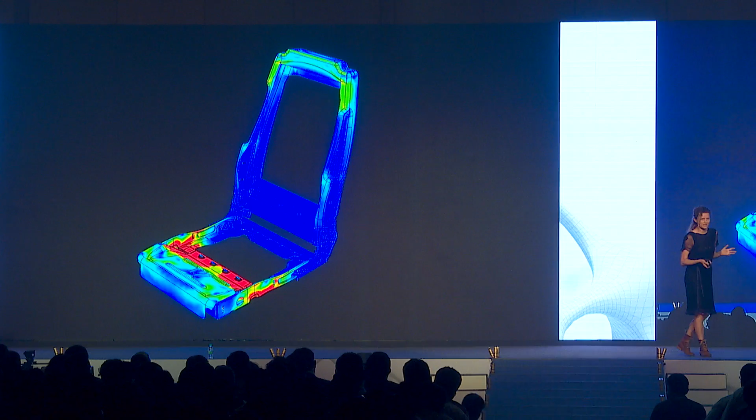The simulation comes back. I see in the red zone that it might crack, so I'm starting to change the design, add a little bit of material to pass the simulation. Did I make a better design with that? Maybe. But did I make an optimal design? No.

Now, with infinite computing, what we will do, instead of evaluating one option at a time, we can evaluate many options at the same time. That is the value of the infinite computing. It can extrapolate, it can mutate, it can mash up thousands, infinite numbers of designs simultaneously.

Welcome to generative design. Generative design takes goals that are set by a designer, by an engineer, such as cost, weight, style, material, etc. Basically, think of any criteria that describes the problem, and uses intelligent algorithms, very often based on evolutionary patterns, to basically create a massive number of design options, design variations. We say it opens the design space to evaluate all the options.

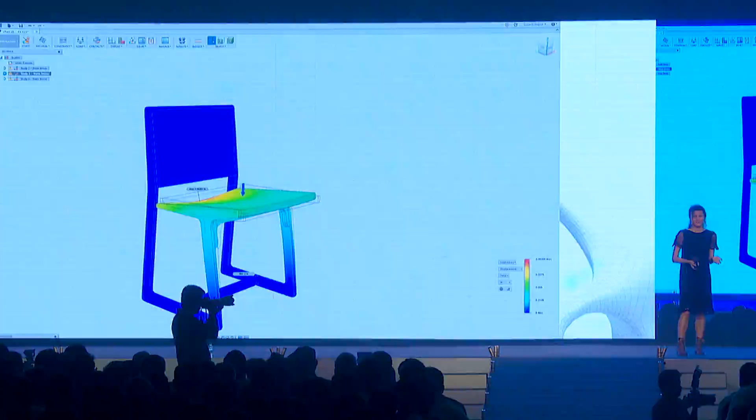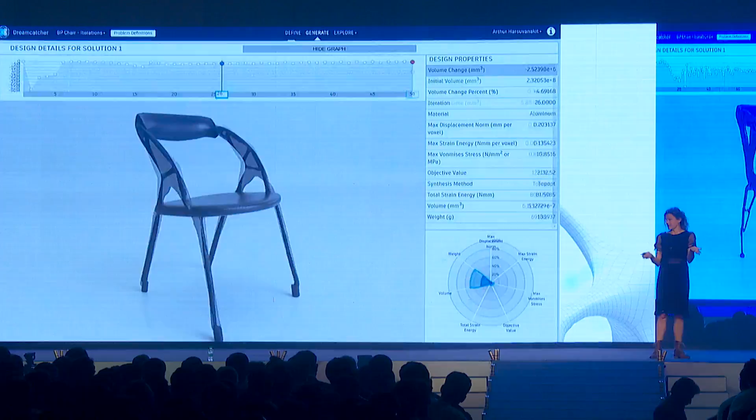So with generative design, instead of applying simulation after we finish design, or do simulation during design, we're going to simulate to design, to discover all the possible options within the entire space. And this evidently will lead to major reductions in cost, in development time, material consumption, and in product weight. But it's not only that. This new approach lets us design in a new way and lets us see options and variations and designs that we could never have thought of before.

Now, since you all love motorcycles in India, it seems, I wanted to show you a competitor to your motorcycle. These are the Lightning motorcycles. It's an Autodesk startup, and they have produced the fastest motorcycle in the world. I ride a Ducati. It's not as fast as this one. So, did I mention it's an electric bike? So winners stay winners only if they improve. So they keep on thinking, what can they improve to make this bike stay the fastest bike in the world?

One goal is to reduce the cost and weight, to improve the lightness of the bike. So here we see a swing arm. That's usually a very strong part. It's quite heavy because it has lots of forces. So they started to look at how they could reduce the weight of this part. It's a complicated problem because it has a lot of

various forces that come to it, and it has to hold the whole bike. So we applied generative design to the problem, and we arrived at something like this. As you can see, generative design mimics nature. What you see in the first image is actually a cat pelvis. The second is a dog pelvis. The third is the design we arrived at.

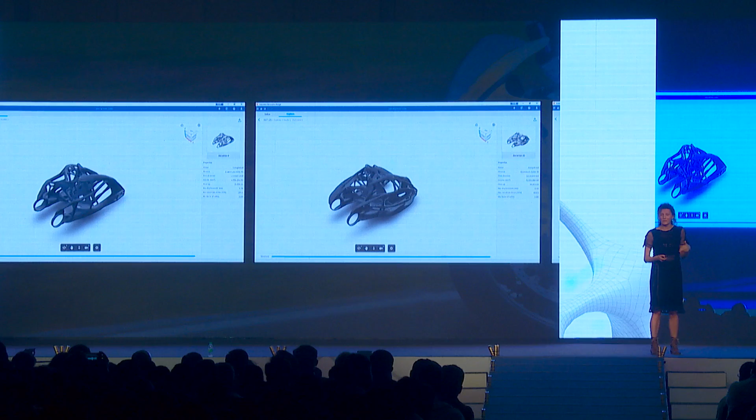But that was when we gave generative design the shape to start with, and then we optimized the topology of the shape. But we don't have to start like that. Instead of using generative design just to converge from our design, it can diverge from our goals. In this case, we will just tell it the goals, set the constraints - where are the forces, where is the weight - and we'll get the system to generate many, many options. Then we, as designers, decide which of those options makes sense, understanding the trade-offs that we cannot calculate at the same time because there are many of them.

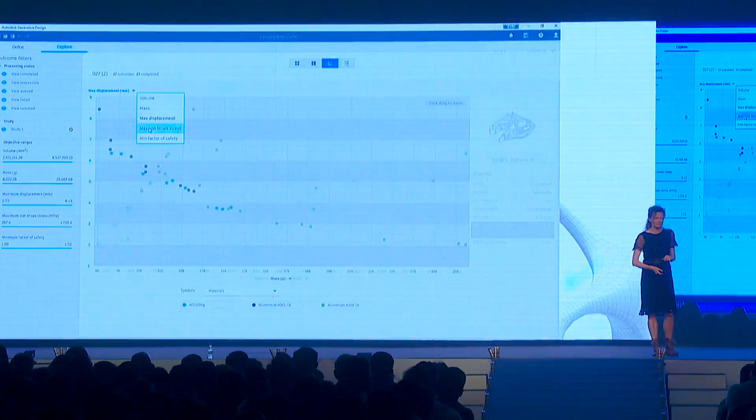And then we can apply simulation to validate the design to finally arrive at something like this. This is a very curious design, and it's not a design that somebody would have come up with. So there are very interesting things coming.

From last year, you might remember we worked a lot with Airbus, and they're really interested in improving the experience of flying, making flying more affordable for us, but also making it better for the world, more sustainable. So the first project we did with them was to address one of the partition walls that is very heavy, and to use generative design to basically reduce the weight of this partition wall, but without impacting its bare function, which is to hold the stewardess seat.

So we ran it again through the algorithms, and as you can see, it was crunching and crunching through many variations, giving us feedback all the time - if you do this, you gain this, but you lose this. Finally, we arrived at a number of selected options, and from something that was completely solid, it ended up using a third of the material. It was 45% lighter, and it saved Airbus a lot of money. Now listen to this - Airbus thinks that if they implement this partition wall on their entire fleet of A320s, that would basically be like removing 60,000 cars from the road.

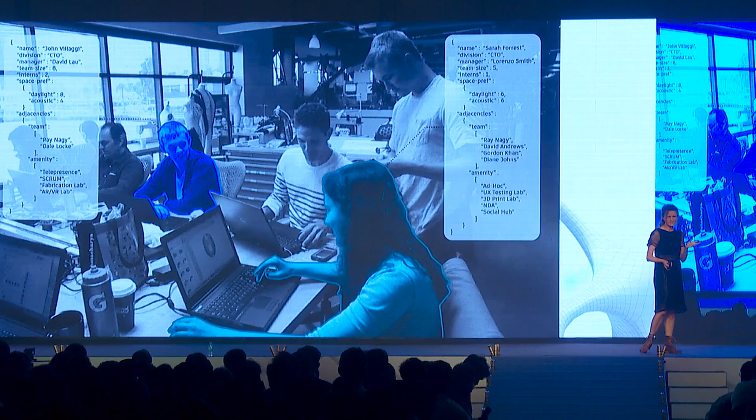We interviewed all our colleagues and asked them: where do you want to sit? Do you want to sit next to the window? Do you want to sit next to the kitchen? Do you like to be quiet and not have people bother you, or do you like to be in a community, etc.? So basically any factor that was making their life, and thus work, better.

And then we defined the goals. What's very important is that you define measurable goals. The system evaluated the survey data against a set of hard constraints - we had hard constraints because the building was already built, so we had to agree where the corridor is, where the kitchen is, etc. And then we let the system go.

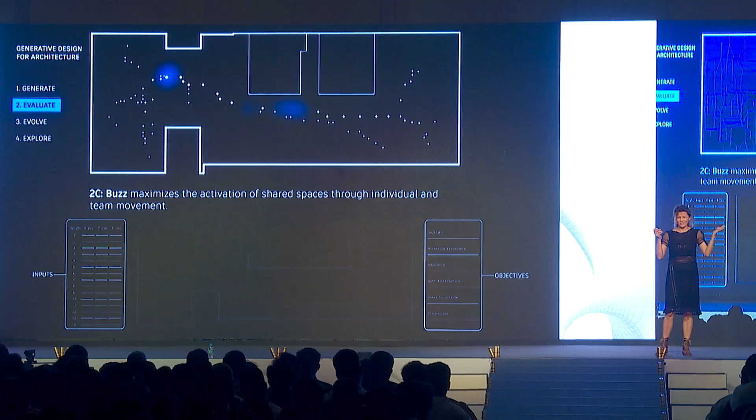The power of automation. Think about all of this. We as humans could never think at the same time of so many factors, so many people, constraints, and trade-offs. But the computer can, and it can visualize it, and give me information I could never have had before to make the right decision.

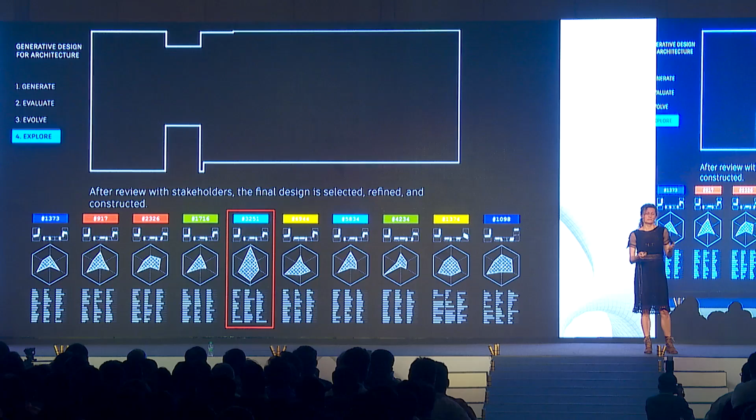This system generated, evaluated, and evolved over 10,000 options, and it arrived at something our colleagues are quite happy with. We'll tell you next year how it went, but the first two months seem to be working out. What's important is we were not just pushing cubicles or Lego boxes to understand how to do this.

Our relationship with the tools changed. Earlier we were just directing them. What we do now is create a relationship in which the tool understands us, understands our goals, and serves as a collaborator to offer options to us. So remember, generative design is not just about surface or volume optimization or topology optimization. It can help augment our own creativity.

Now, many structures and products that we can generate with generative design result in geometry so complex that no subtractive, traditional type of manufacturing can produce. It is thanks to additive manufacturing that we can actually produce these things.

So let's talk about additive, or as we popularly call it, 3D printing. Unlike subtractive methods of manufacturing, where you take a piece of material and carve out until you arrive at the shape you want, discarding a lot of material, in additive we just lay layer of material and use only as much material as we need. That is the first value of additive. But that's just the first one.

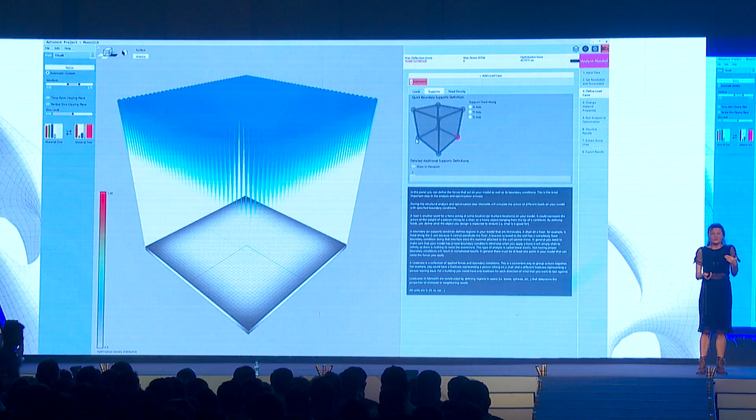We're also experimenting with voxel-based technologies. Why? Because if a printer can literally print every pixel, every voxel in different material, density, and color, then we need to learn how to design for that. So this is not only topology optimization as shape optimization, but material distribution across the product, so that we can design products like this, or create materials with non-linear behavior, so that our designers, you, can create beautiful designs like this one from Sawako Kaijima with beautiful, beautiful details of this table.

3D printing today prints small, slow, and expensive. But we want it cheap, fast, and big so we can go in AEC, right? So we do something about that as well.

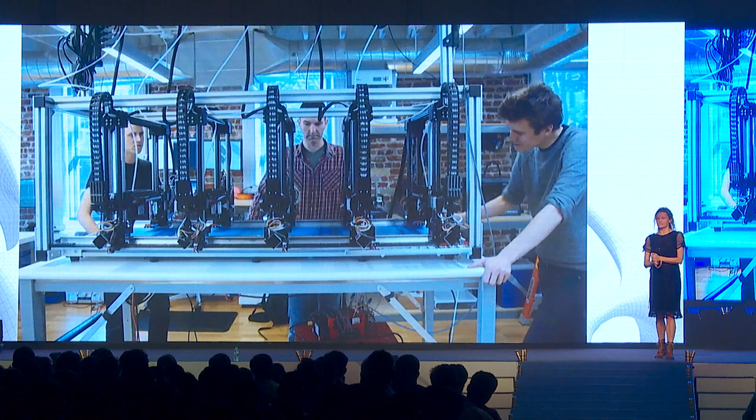We have a project called Escher. It's an OEM software that anyone can use to build machines. What it does is make the fabrication process parallelized across multiple tools. In this case, you're seeing 5 print heads, and our Conductor software instruments them so they're all dancing together to print one large part.

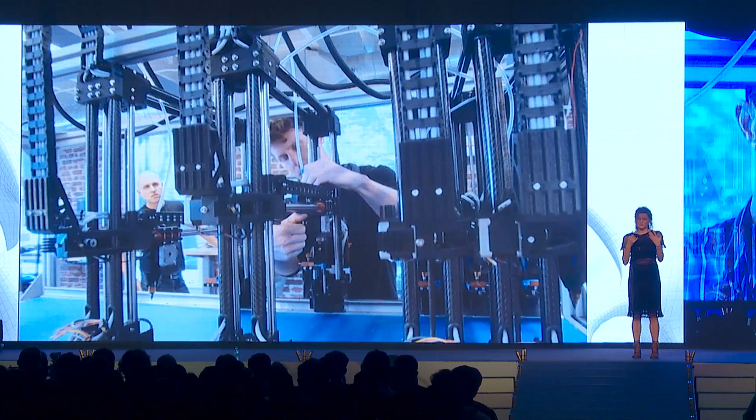What's really important to remember is that this system is flexible enough to accept not only additive tool heads, but also subtractive, because the future of manufacturing is not additive, it's not subtractive, it is both. It's both of the two worlds that we will need to arrive at a better future.

In the future, we'll be able to apply the same principles on every level, from nanoscale to urban level. We'll be able to print DNA, print organs, print fractured bones, print custom prosthetics, print food, print new performative materials, create new types of fashion, create cars.

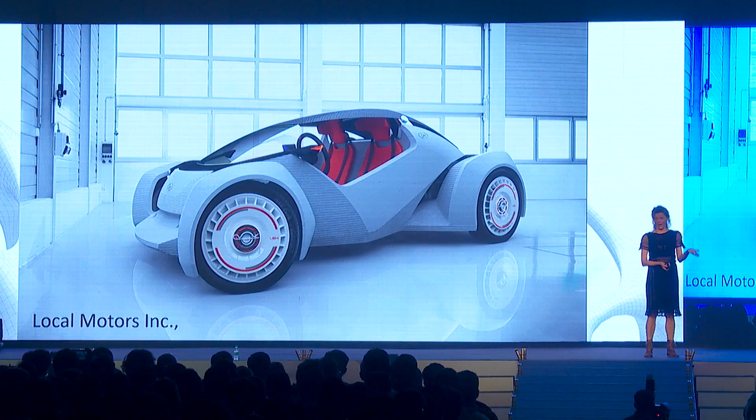This is already the first car that is 3D printed. It's Strati from Local Motors.

We can print buildings on planet Mars or on planet Earth, like this building from the WinSun Group that is actually costing just $5,000, and can print 10 a day. It's low-cost housing. But this is just becoming stronger, bigger, and better.

And there is a lot to see in the upcoming years.

Now, Pat mentioned the magic word sensors. We also live in an age of sensors. The sensors are becoming so ubiquitous, they're becoming smaller, more powerful, more affordable.

So today, with the laser scanner, for example, it's easier than ever to digitize the analog world around us. Once we digitize it, we can convert it to point clouds of buildings, of spaces, that can then help us actually start working in the space without having to always first redraw in AutoCAD or remake in BIM in order to even start the task.

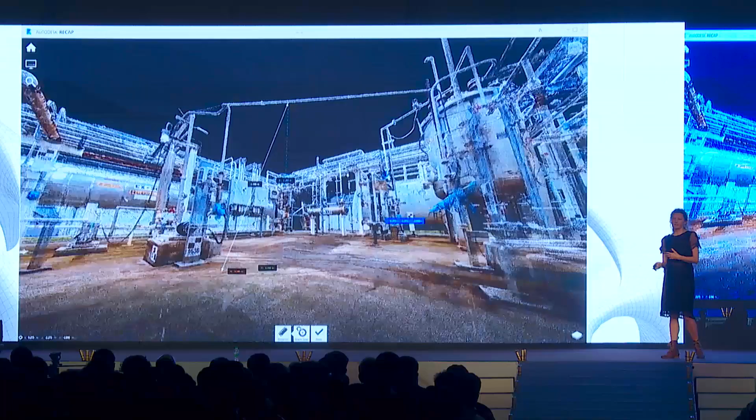This is how a scan looks like, without any post-processing. With smart software, we can register individual scans with a single click, visualize the point cloud in many different forms, measure it, and most importantly, prepare it for our hero apps so you can use it as a start for capturing context of a project, for capturing progress on a construction site, or seeing the difference between as-built and as-designed.

There is another process, even easier. It's called photogrammetry. Today we have the possibility, with simple photos taken with your iPhone, to take a bunch of photos around an object or from a space and automatically convert them to a 3D model. It's fascinating. Could you have done this with Max or Maya? Of course you could, but you need expertise, you need a lot of time to do this. This is just taking photos, and the algorithms do the rest.

So now put these cameras on a drone, and we have a whole new world of access from the air, where we can easier than ever capture entire sites, either for pre-planning in construction or for land takeoff, etc. The drones today are becoming so easy that you can walk and they follow you like a dog. They can be flown easily by defining a flying path, etc.

A lot coming here. But this is not only interesting for new buildings. We're talking about, for the first time, the possibility to save our heritage. We're losing our heritage on a daily basis due to tsunamis, earthquakes, wars, terrorist attacks. We have an obligation to our future generations to save it and capture it, to make a blueprint of what we have today, and maybe use it for further restoration, etc.

In India, the government of Rajasthan is the absolute leader in this area. They have realized the potential of this technology, and they're not only using it to capture the gorgeous palaces they have in Jaipur and all around Rajasthan, but also planning to use it for further planning of the cities, marching towards the smart city concept.

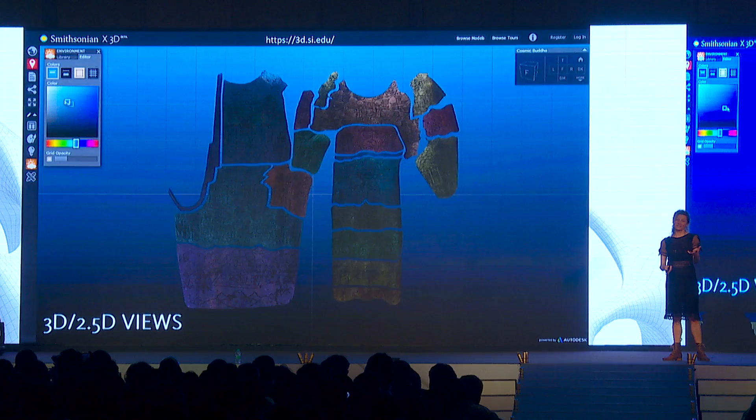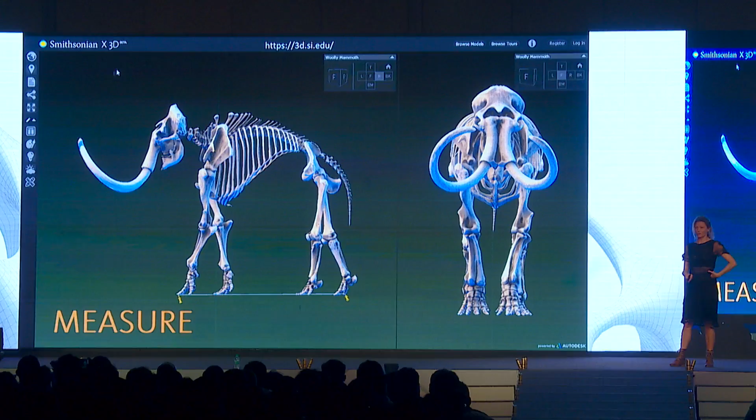Well, how about putting the museums online, where curators can tell the story about their objects in a 21st century way, but also teachers can teach with this tool that is now an online tool that displays all of these digitized objects and teach in a more experiential way, in a way that the kids of today would love to learn. So imagine you're a teacher who teaches about the mammoths, and you tell the kids, hey, open the Smithsonian model and tell me how tall is the leg of the mammoth, or let's make some art with this mammoth. Let's make a sticker for the t-shirt. New ways to educate. The latest project of the Smithsonian digitization was the Apollo 11.

You can see it actually in the exhibition hall. So we digitized the heck out of this object because usually nobody goes inside, and it was going to be open from the plexiglass box for another exhibit. So we did photogrammetry, laser scanning, structured light scanning, everything possible to capture a record of the Apollo 11. Today, you can take the AR/VR set in the gallery and actually sit in the Apollo 11 as the astronauts did.

Professor Saunders from Penn Design is using the same technology to teach. He's teaching Baroque architecture, and very similar to your traditional vernacular architecture, Baroque is very complex. But when I studied architecture, we learned from floor plans and sections. Well, you cannot really learn like this, because Baroque, in this case, is architecture that is a combination of painting, of sculpture, and of the architectural elements. So what he did, he went to Italy and captured with his students 14 of the most iconic Baroque objects, Baroque churches, and he created beautiful topology of these churches.

Then they created a website on which you can experience these churches with beautiful imagery. These are, by the way, the interiors of the churches. Imagine you fill a church with water and then you freeze it. This is what you're seeing. And you can also see this exhibit in our exhibit hall. The idea is that students now for the first time can understand the whole complexity of Baroque architecture, take a church and start reverse engineering the language behind Baroque architecture. So you see, same technology, a lot of different uses.

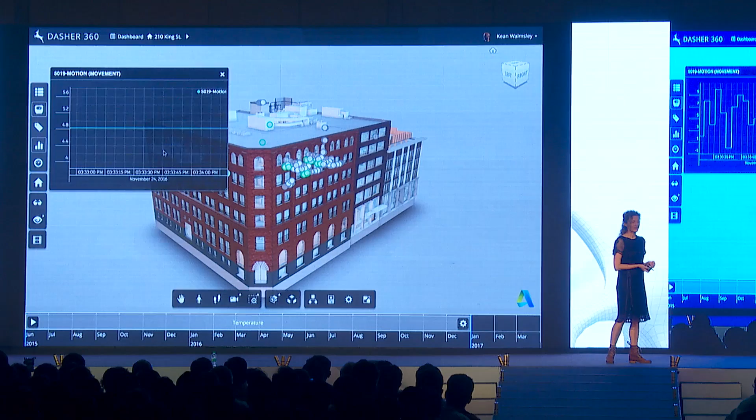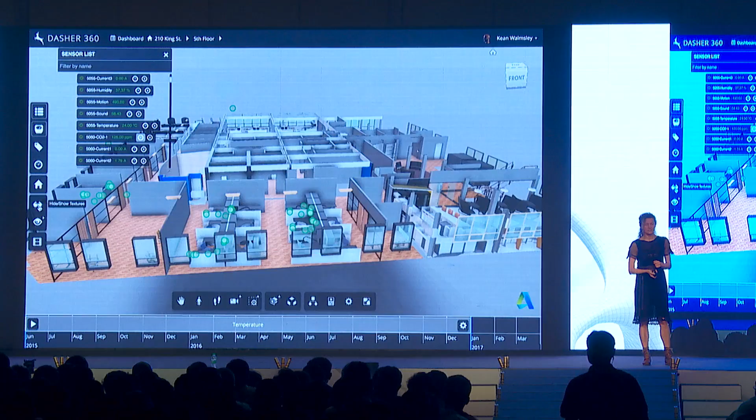And then we needed a way to visualize the data. This is an interactive building performance visualizer called Project Dasher that we're working on at the moment. And it combines sensor technology with cloud-based analytics to bridge the gap between design and building operations. This live dashboard will tell us at all times what's going on in the building, so we can finally understand the cold and hot calls and really leverage this to understand, did we design the buildings good, and what can we do about the maintenance.

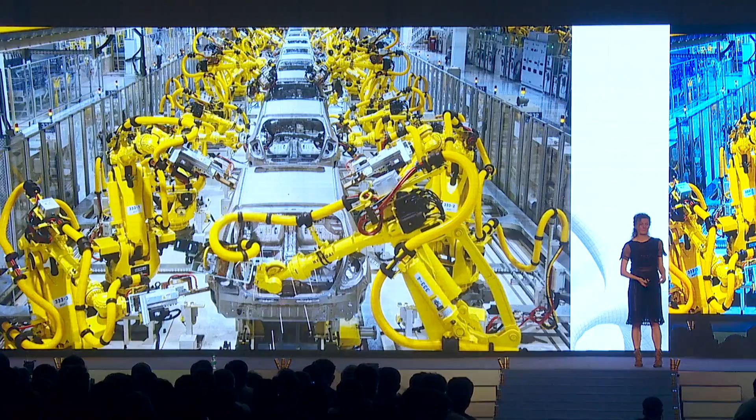Now, one cannot talk about the future without talking about robots. Robots are lovely, and robots are scary, but they're nothing new. Robots have been existing for quite a while. That's how manufacturing happens, and they're very, very powerful machines. They can do a lot of things that we cannot do. But they have one big weakness: they're very difficult to program. So if you look at this assembly line here, if you wanted to make a change, to reprogram all these robots will take a year and an expert.

And this is a real bottleneck. This bottleneck is what prevents companies from being more adaptive about their products, from changing them more often, let alone doing personalized products. And this is the same reason why other industries like architecture are slow in adopting robots, because they're simply too difficult to interact with. And there is another thing: robots are not quite aware of what's going on around them, so if I pass by, they might literally kill me because they don't know that I'm there, or if the conditions change, they don't know what to do because they're programmed to do just one thing from just this location to just that one thing.

So how can we make these robots, these machines that could be so powerful, easier to use and create a new language to talk to them? And that is what our research group at Autodesk is doing. We're trying to see, can we develop a language that is much more natural?

Can we, instead of giving robots specific tasks and directions to do one thing, teach them the principles of what we're trying to do, and then let them do it? That's exactly what we're doing.